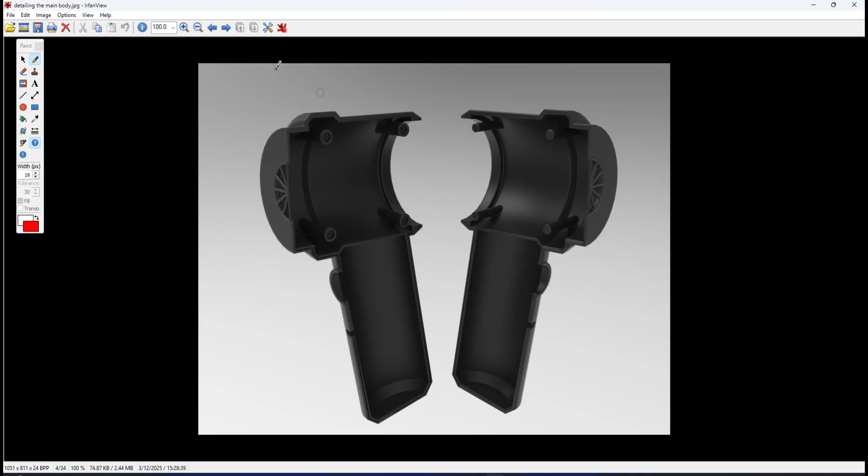He asked me, sir, how do we do this? This is the handle of his mini vacuum cleaner, kind of an organic shape. But the problem is how to make the splitting. For this handle, we have a splitting line, with a green casing and a white casing. To do the splitting, let me show you in SolidWorks.

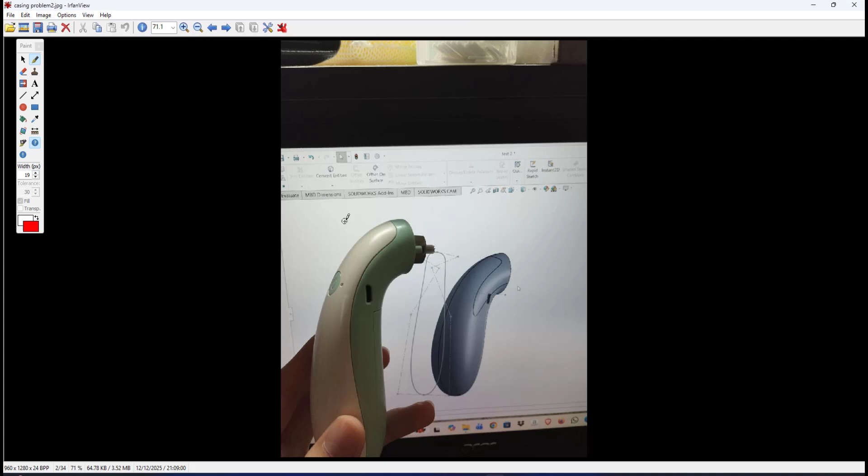This is the main body file. We need to draw the outline as shown in this photo. Let me undo this. We need to create this straight path. Looking from this direction, we will create the plane there. I'll create a straight line like this, and make a 2-point spline to create the outline for me to do the splitting.

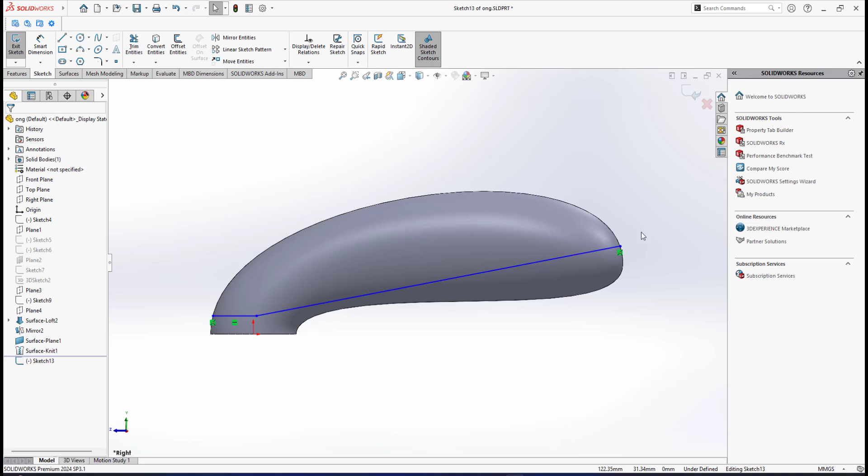So here I'm in this viewing direction. Since my right plane is in the middle, I'm viewing in this direction. I'll create a line like this, straight, going up to maybe about this point, and here I'll do a 2-point spline up to where it touches. I don't have the actual product, so I'm simply guessing. So this will be the case. With this 2-point spline, I can control the handle like this, as long as I can get the shape, the outline to make the top casing.

Also here, sometimes it's not showing the right handle. Okay, so this is the right handle. I can play around, not too much, and maybe go for like this. This will be the white casing, and the bottom one will be the green casing. So it's something like this. Let me adjust a little bit, I'll put it a little bit up above like this. This will be my splitting line.

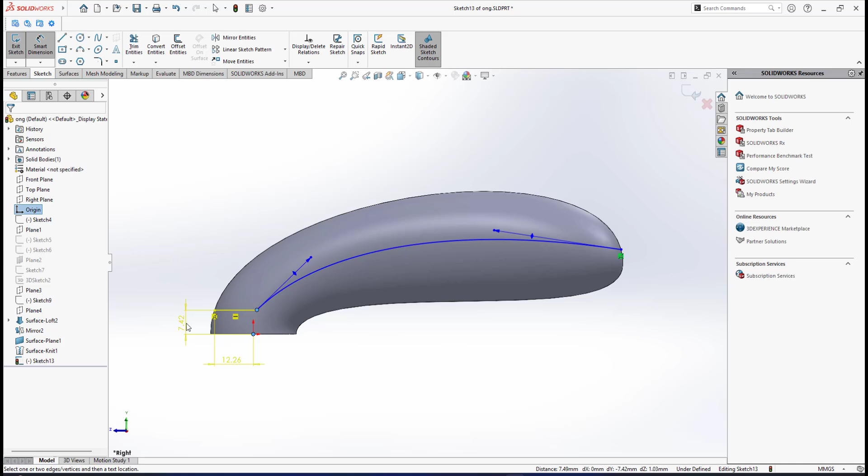I can make this fully defined if I give dimensions. For example, from here to here, I give a dimension. I'll quickly show you, and put some value just to make this fully defined. I cannot put the vertical, actually it knows the position there. Also about this, from here to here, I can give a value like this.

And also the position from this point to this point. You cannot define like this. I should give one more dimension, maybe from here to here. I give a value, so now we have it fully defined, right?

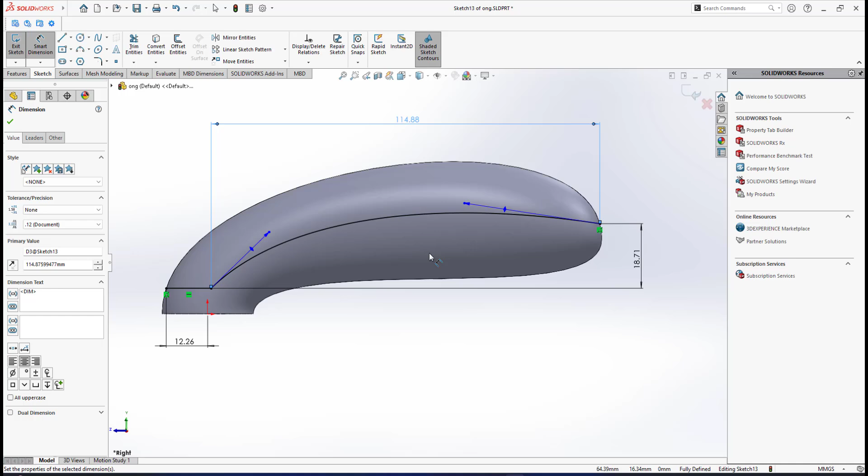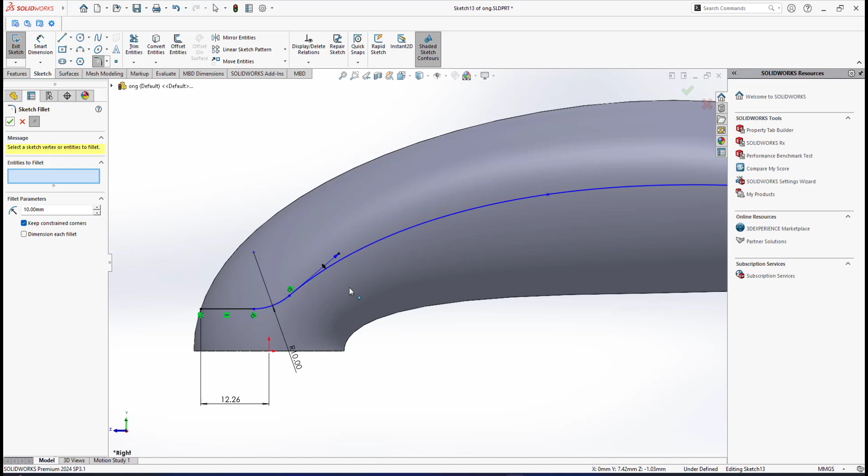Okay, just quick to show. I don't want to round out the value, just need to show. Since I have this outline, before that I edit this thing, and I need to make this curve. Since we have a rounded corner, as you can see from here, I make a fillet radius, maybe I can go for 10, so I have this curve. Just click OK, then click OK. This would be my... okay, never mind, it's not still fully defined since I need to put certain dimensions, never mind, I'll just quickly show you.

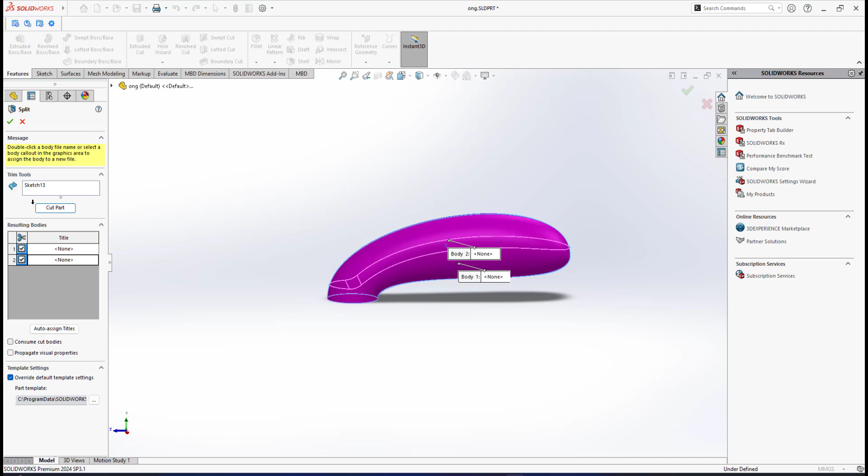So I have the outline here, so I exit the sketch. This one is okay. I do split, selecting the curve here to split, cut part, and make sure I select both, and make sure consume is not checked. So now I have the splitting to form the casings - if I select this one it will be the top casing, and the bottom will be the bottom casing, the green casing.

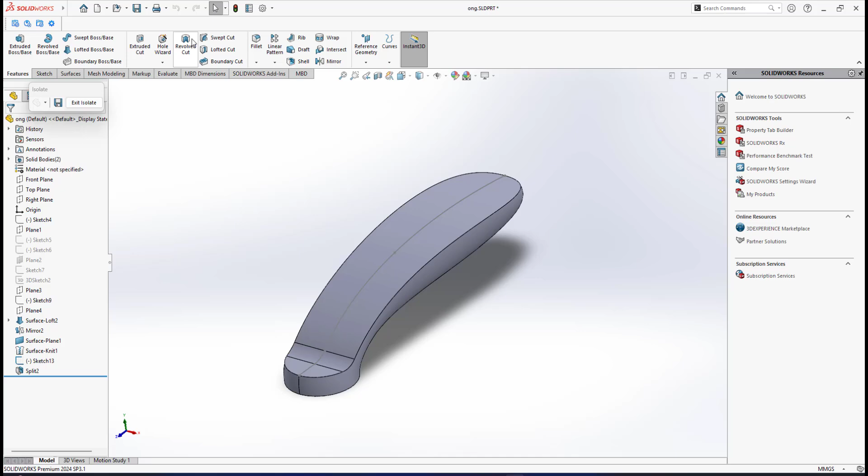All right, as you can see, if I exit isolate now, I have the splitting - I already split this main body into top and bottom casing. Another thing is we have kind of like this, so we can do a shell. Since the casing is not solid, I can do shell to form a shell. But what about this battery compartment of this green casing here? Let me show you.

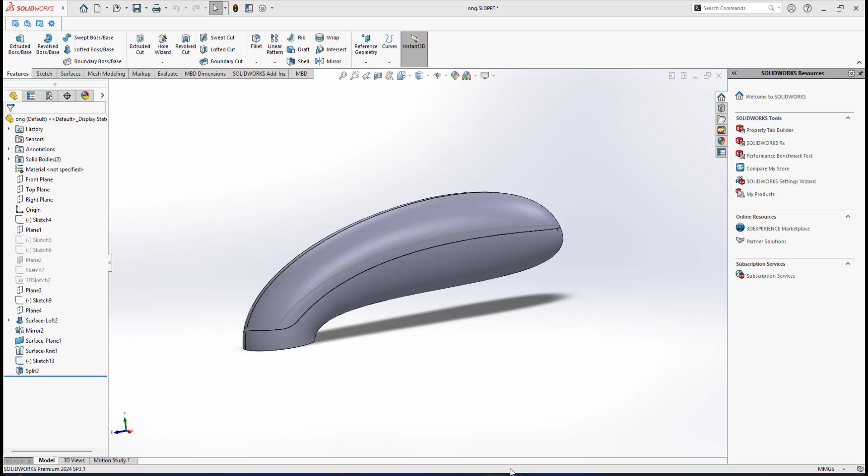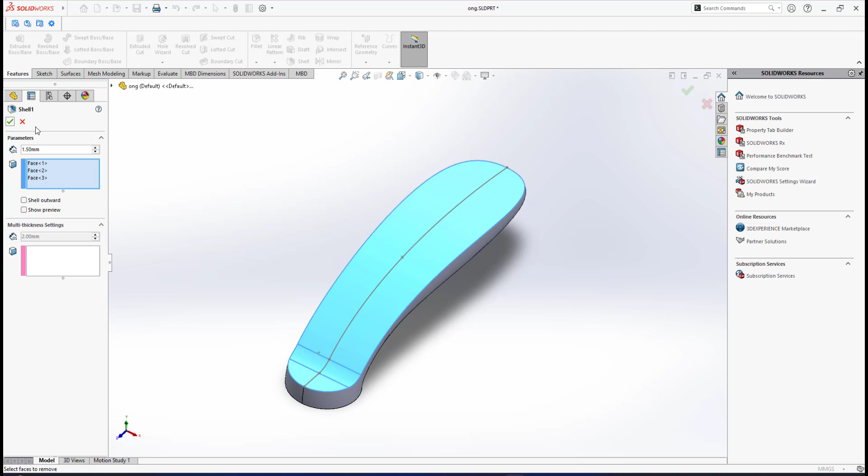If I do shell - for example there is a green casing there, isolate, then I will do shell. Normal shell thickness is not more than 2. So if I select this place and this place and this place, I do shell, so I have this. I think 2 is too much, I'll go for about 1.5. 1 is too thin, I'll do between 1.5 and 2. So I do shell, hold on.

So I have this bottom casing here.

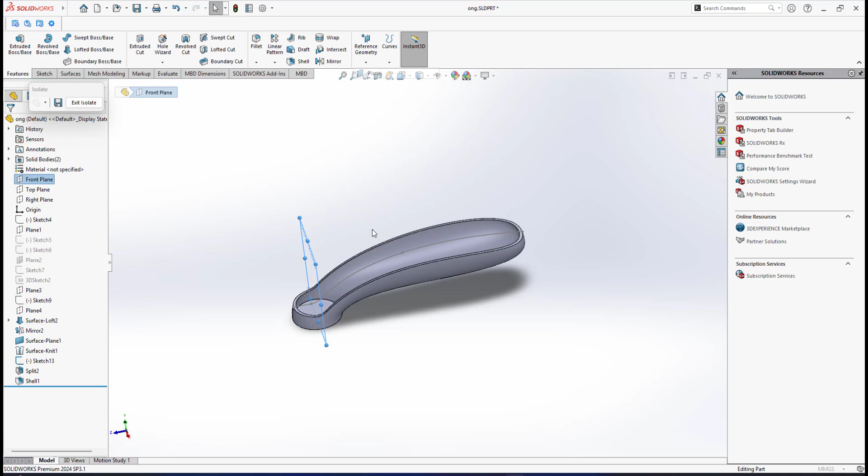So it means here I will make a battery compartment. I go for the front plane, then reference geometry. So the plane is already selected. I go for flip offset, and I will give some value about this.

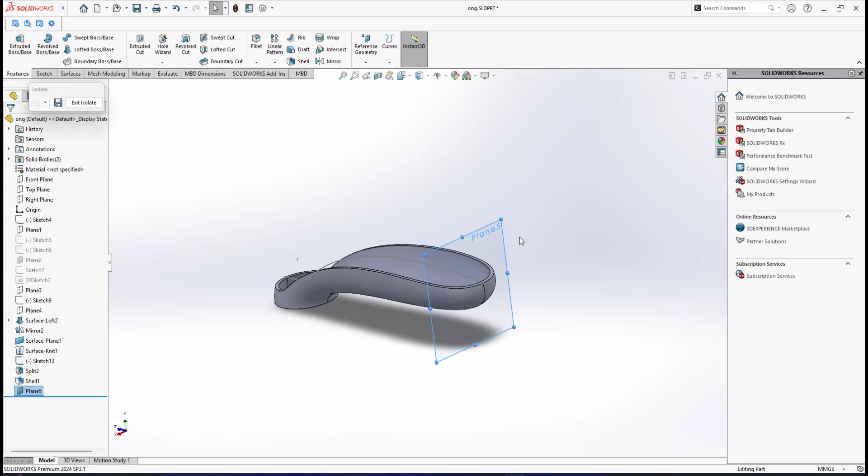This will be the starting point for me to do the battery compartment at that position. Let's click OK, so this will be in horizontal mode. So I will draw a sketch, going for the other viewing direction.

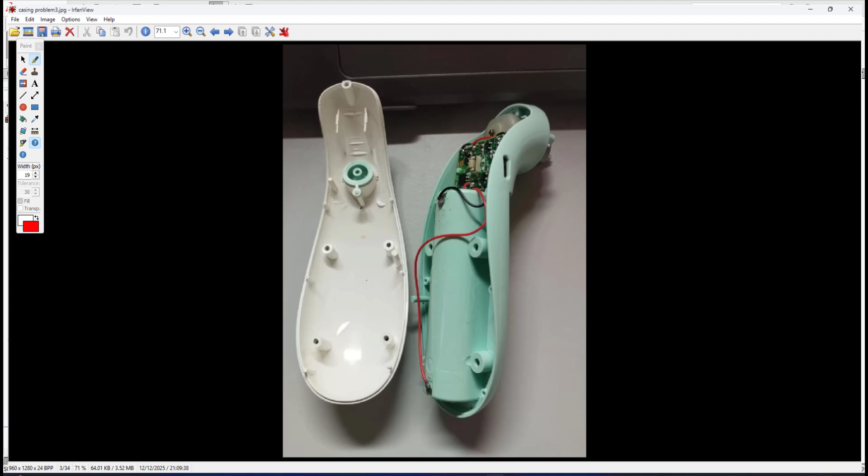So I will kind of draw a shape of the battery compartment. I will draw the center line from this point up until it goes vertical and touches. The battery compartment shape is more like it's not a circle, it's combined with a rectangle and circle. Let me show you.

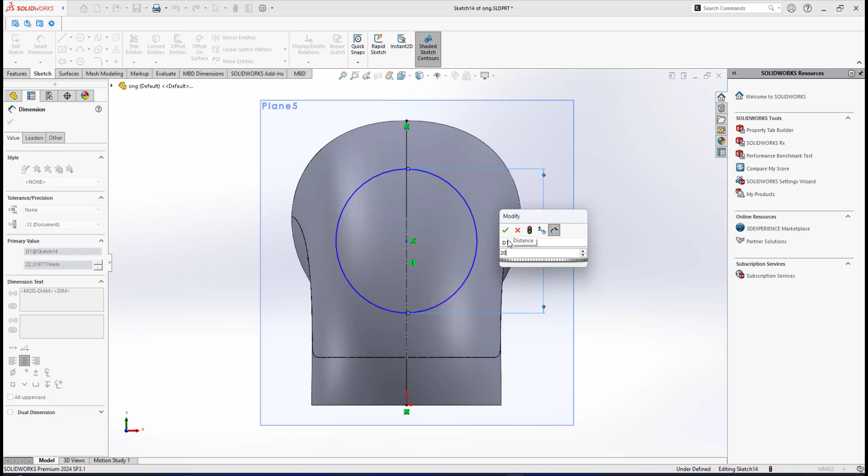So I will draw a circle. Actually I don't have the actual product, so I simply guess the diameter of the rechargeable battery is 20, where we will fit the rechargeable battery. About the dimension from the center point, I simply guess it about this level, let me go for 25. And the shape of the battery compartment is actually not round, it kind of combines rectangle with the circle.

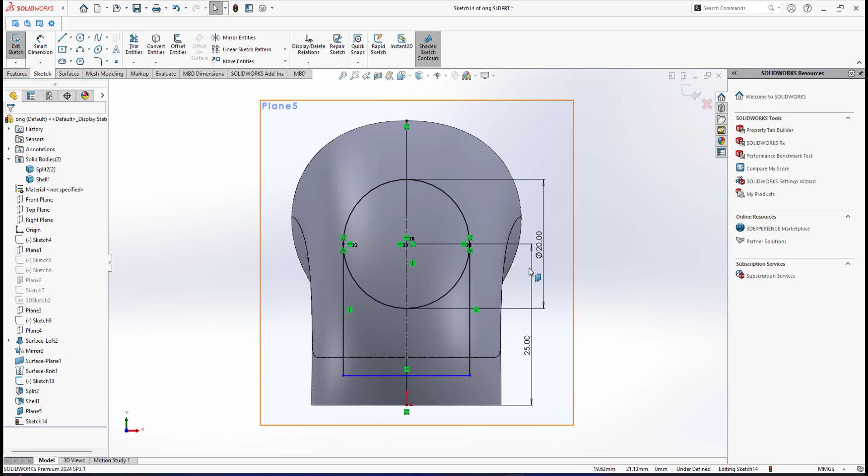So I just make it something like this and touch like that, it's already tangent there, so I just make it simple to this bottom side, just to quickly show you. I don't want to make it fully defined, and maybe I can trim this one.

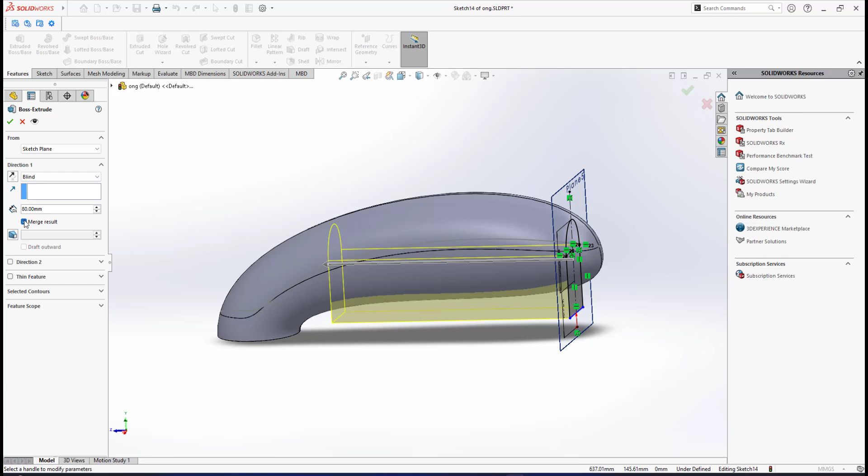Okay, now I will do here, as you can see, I can pick extrude. I simply guess the size of the battery is about 80 units, something like that. Then here I will not click merge result, I make it as a separate body. I click OK, so now I have a different body.

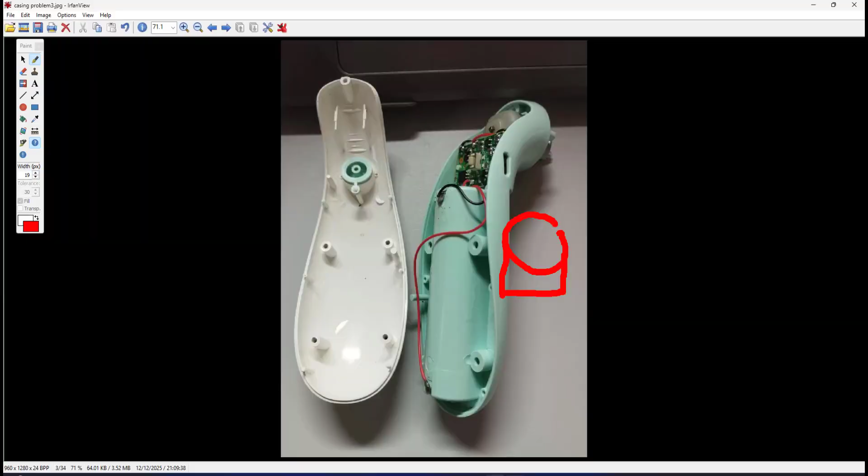This would be, I will create a battery compartment as shown here. Now, if you look in SolidWorks, these solid bodies are for me to form the battery compartment. So I isolate this one first.

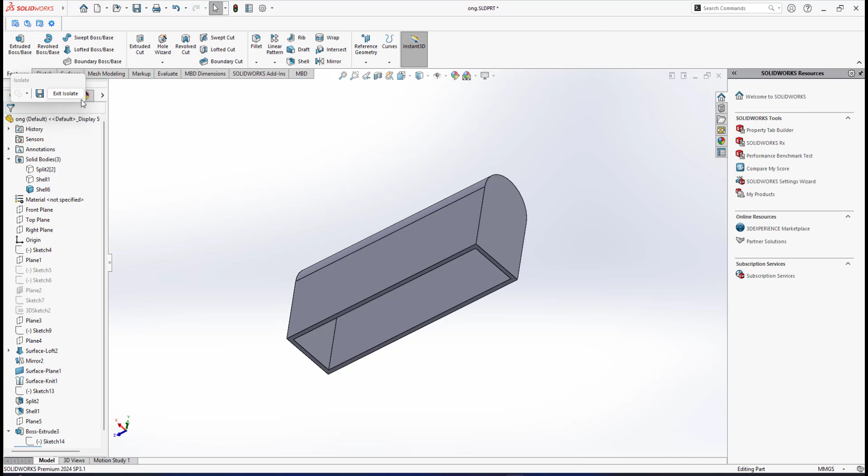I need to shell this thing, shell of let me go for 1.5. I select this one, so this one is a hollow thing, right? If I exit isolate, then the next thing to do is...

As you can see here, now I will isolate this bottom casing and also this battery compartment, so have these two things merged like this. Alright, this is a new thing for you, another new command for you to learn is about intersect.

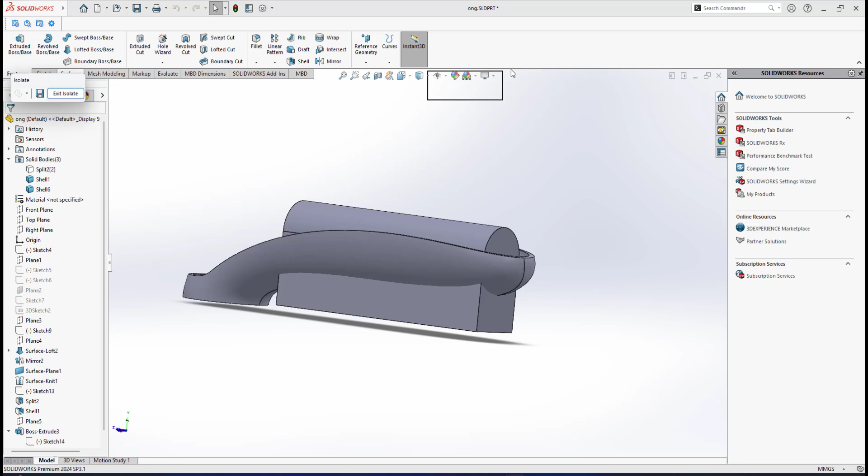In SolidWorks, under insert features we have intersect. Intersect means, here the setting on the left is intersect. If I select both of these two solid bodies, the bottom casing and also the battery compartment, the setting on the left, the best way is to check and create both, meaning it will create intersection of internal and external region.

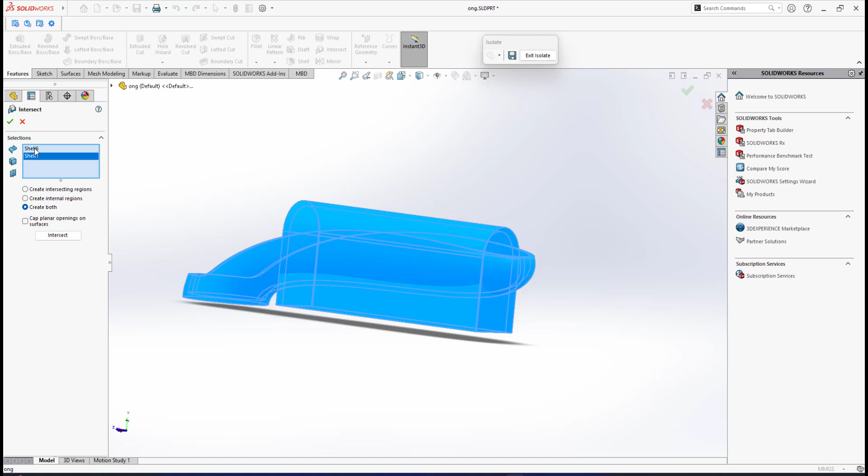So I check and create both. The two solid bodies are already selected, then I click intersect. What SolidWorks will do is predict, here we have the list. After we click intersect, SolidWorks already calculated and it will predict the region that we can check here to form the battery compartment together with the bottom casing.

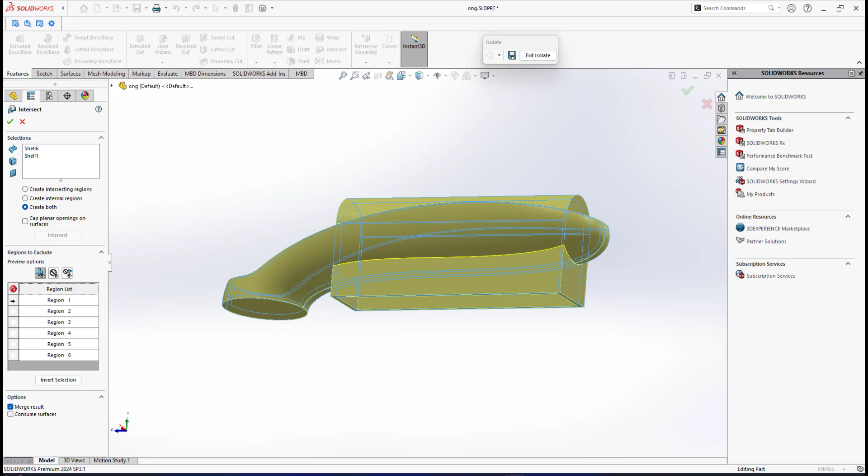Okay, here's region 1. If I check region 1, it kind of cuts out internal - I don't want it to be like that, so I uncheck it like this.

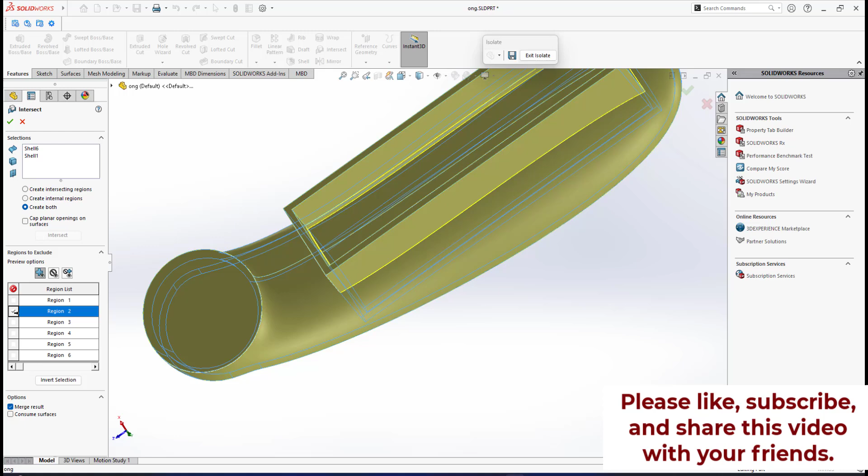Okay, let me go to bottom view. If I check region 2, carefully zoom in closely by checking and unchecking it - if I check region 2, it becomes like that. If I uncheck it, it becomes like that.

Let me just play around - sometimes you have to play around with the setting. If I check region 3, it becomes like this, so I will not check region 3. If I check region 4, it cuts out like that - okay, I want it to be like that.

If I check region 5, we make a cutout, right? So it means region 2, region 4, and region 5 are checked.

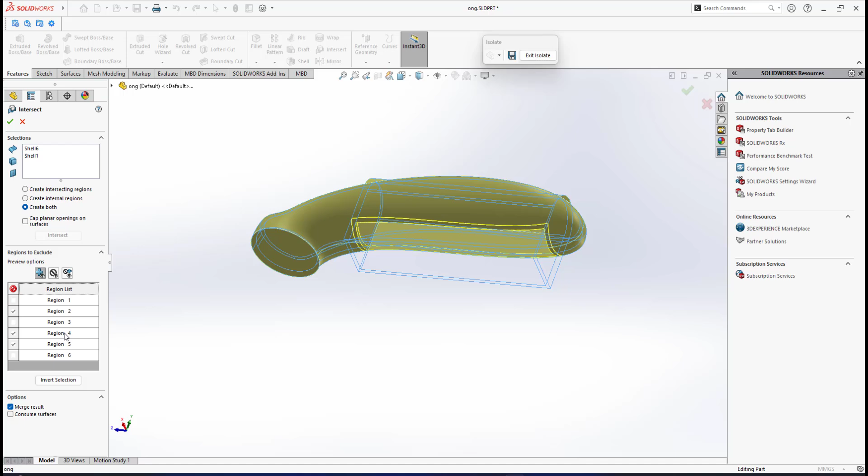If I check region 6, what will happen? It becomes like this. If I uncheck region 6, we have like this. If I check region 6, it makes a cutout like that, so I have to uncheck region 6. This is what I want to make the battery compartment.

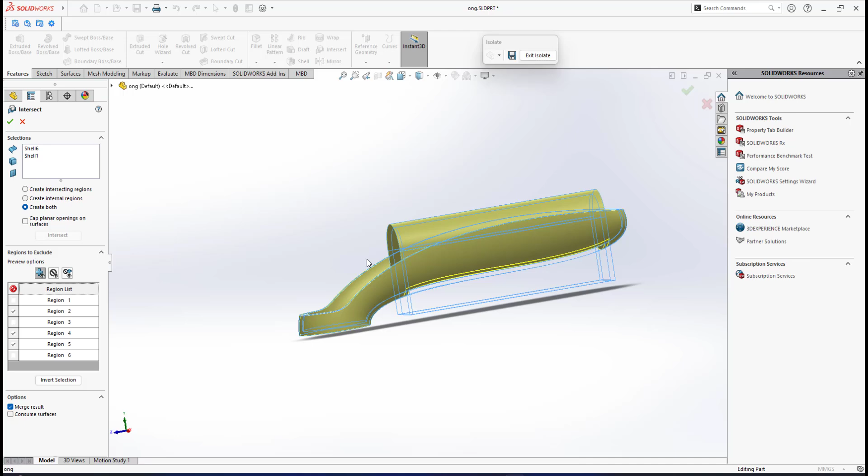Make sure merge result is on, because I want to merge the battery compartment with the bottom casing. If I click OK, now I have this - already one solid body. If you look at the section view, it's merged together as one body.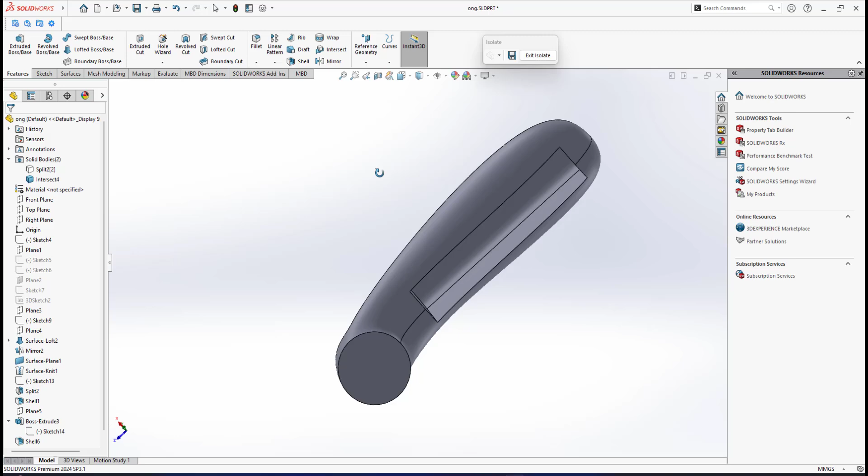Alright, merged as one body - if I uncheck it, it becomes like this. This type of casing that you'll see in plastic products kind of merges like this - this is where you'll fit the batteries, and you can do extra detailing for your bottom casing here.

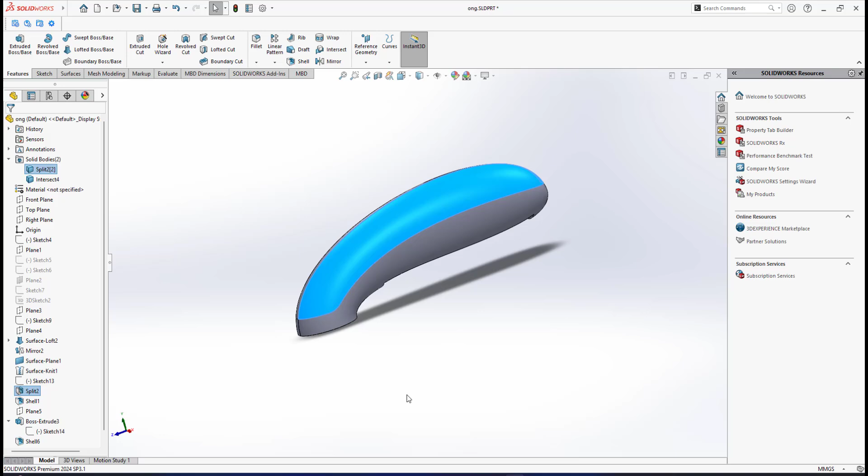Okay, if I exit isolate, I need to show you about the top casing, since I haven't done the shelling for it yet. If I shell with the same 1.5 thickness for this one, I have the shell for the top casing.

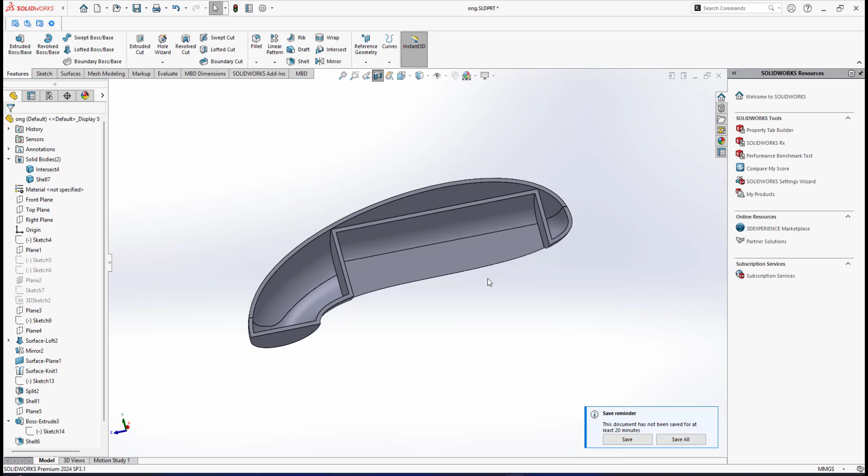Exit isolate, so we have the bottom casing with the battery compartment. If I show you the section view, now we have nicely the top casing and also the bottom casing with the features of the battery compartment.

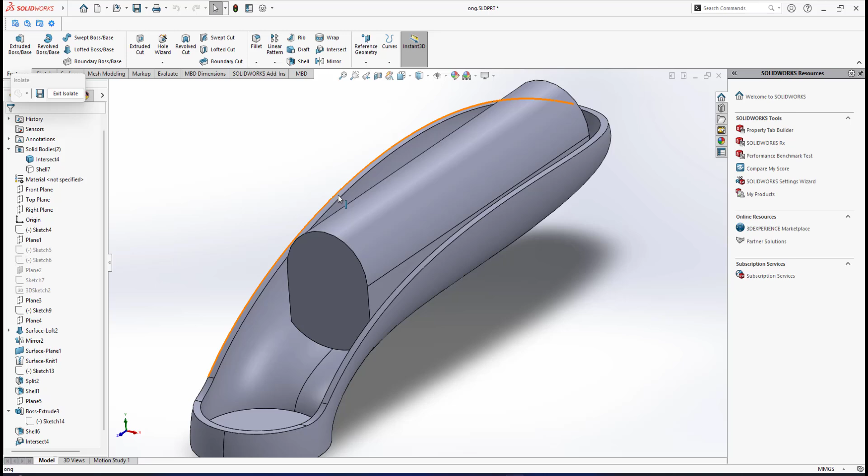Another thing to mention: since I've done the battery compartment for the bottom casing, if I isolate the bottom casing, the way it joins with the top casing is not like this - it actually just features an outline of this surface. Since plastic casing top and bottom won't be joined with a hot glue gun, we need features of lip and groove.

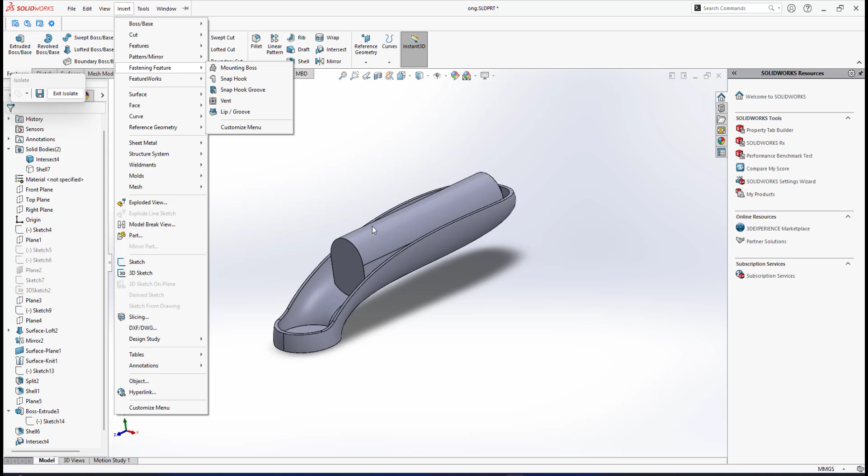So here you can create a lip - manually create a lip - but you cannot use the insert fastening features lip and groove for this kind of curved surface, you will face problems. I found out that the standard fastening features lip and groove that SolidWorks provides is not very friendly for this kind of curved surface.

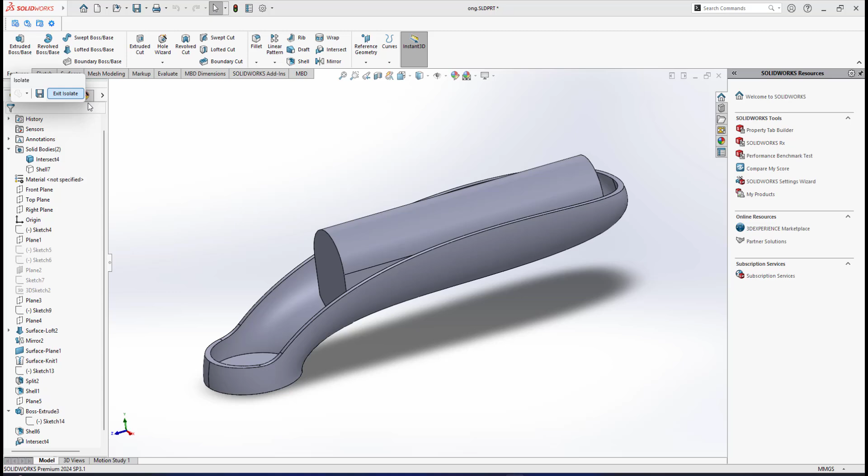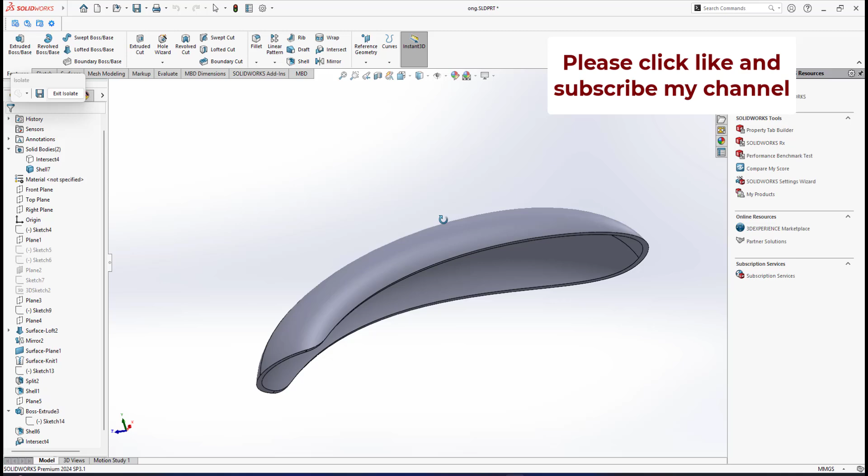Look how I do the manual way to do lip and groove for the bottom and top casing.

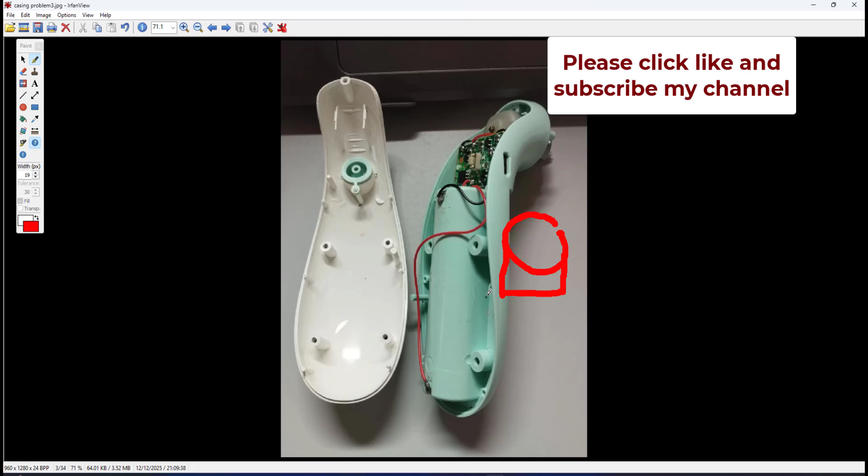As you can see here, we have features here - this is the bottom casing. We have this bottom casing which is actually a groove. The white color we have lips, right? If this one is lip, this one has the groove. Alright, let's watch my previous video, then you can learn how I do this manual lip.

Alright, that's all I need to show you in this video.